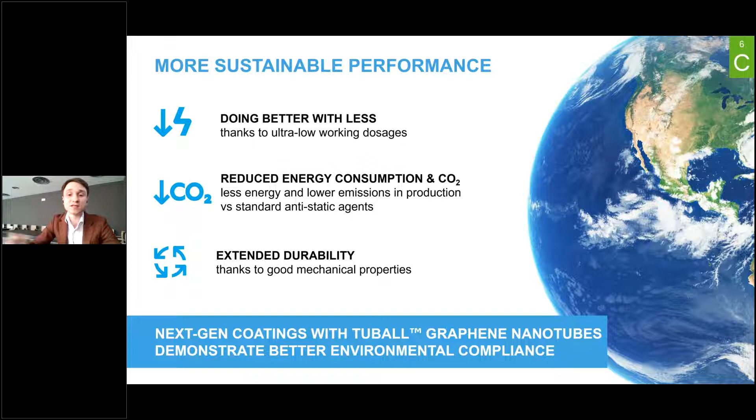To develop a new product with better properties, decreased carbon footprint, and extended durability. So let's look at single-wall carbon nanotubes, try to find benefits of this material in terms of final performance, and prove that this is the best electrically conductive agent from a sustainability point of view.

For the base of our study, I suggest taking 4 different types of industrial coatings, each with its own unique specifics. First, tank lining. This type of coating should have high chemical resistance and provide excellent anti-corrosion protection. Secondly, we will consider ESD flooring with high abrasion resistance and good aesthetic properties.

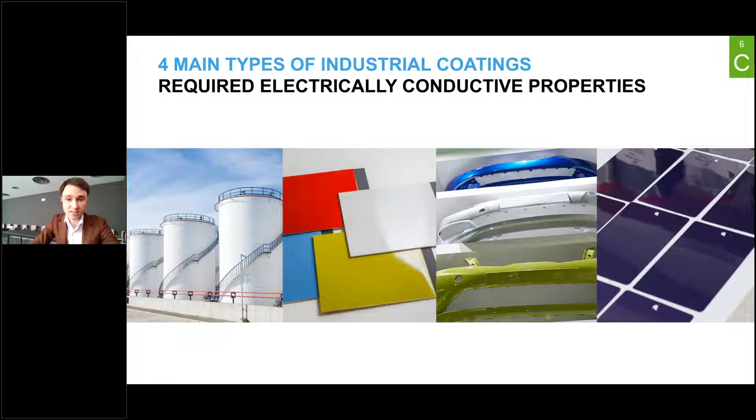Thirdly, we will talk about conductive automotive primers used for electrostatic painting in the automotive area, and these primers should provide very high adhesion and transfer efficiency of the base coat. Last but not least, the fourth application will be powder coatings with good surface quality and a completely different production process.

To bring electrical conductivity to these coatings, you can use 3 conventional fillers: first, graphite powder; secondly, conductive mica; and thirdly, single-wall carbon nanotubes. To be objective and fair, let's choose 7 main parameters for comparing the performance of these conductive fillers. Point number 1, dosage resistivity ratio.

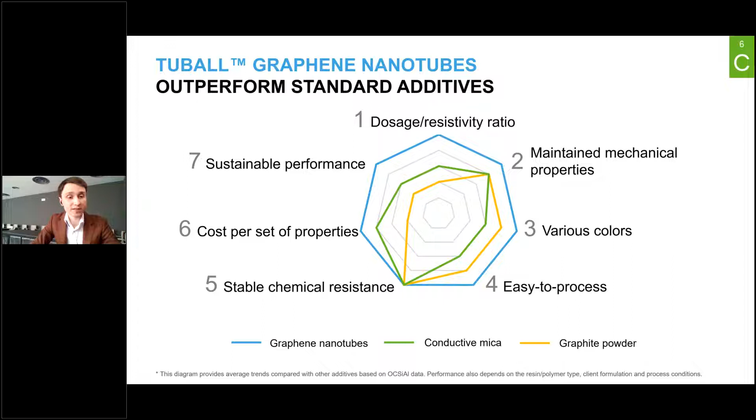Point number 2, maintained mechanical properties - the ability of the filler to negatively or positively influence mechanical properties. Point number 3, various colors - ability to produce colored coatings. Point number 4, complexity of processing - how easy it is to work with a filler. Point number 5, stable chemical resistance. Point number 6, economical aspects - cost per set of properties. And point number 7, of course, sustainability.

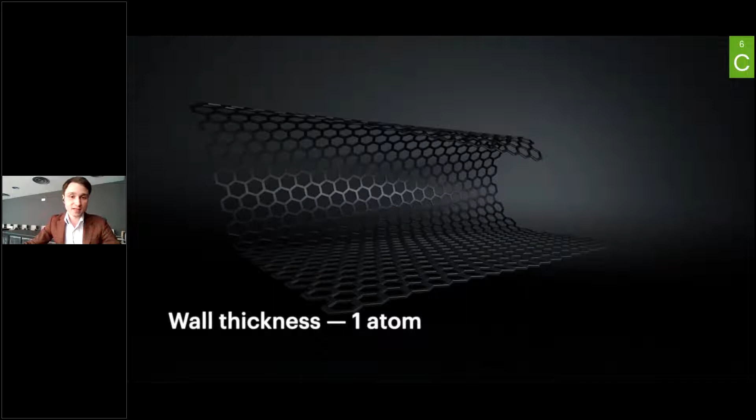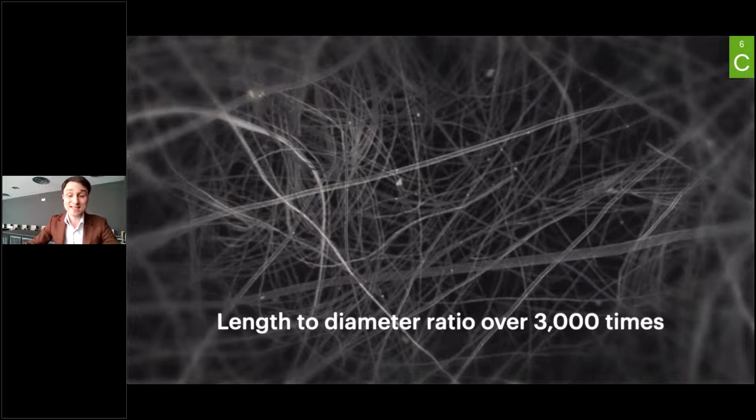Moving forward, I would like to tell you about single-wall carbon nanotubes themselves. Single-wall carbon nanotubes, or graphene nanotubes, which have the trade name Tuball, are tubes with a wall thickness of a single atom of carbon. Their diameter is about 1.6 nanometers and length about 5 microns. This material has an extremely high aspect ratio - the ratio between length and diameter - which leads to unique performance of graphene nanotubes because they are very flexible.

This is one of the strongest materials on Earth with high conductivity. Graphene nanotubes, as I highlighted, are very flexible, and in case of homogeneous dispersion, they provide the ability to influence not only electrical conductivity but also increase mechanical properties. So graphene nanotubes allow us to create completely new materials with a full range of required properties demanded from the market. Now let's explore which specific properties single-wall carbon nanotubes can bring to industrial coatings, and why they are better than any other antistatic additive.

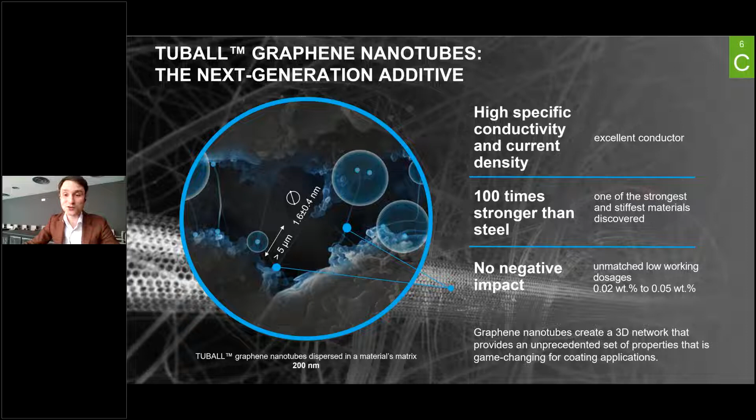Coming back to the final applications, I would like to start with tank lining coatings. Many companies have already validated single-wall carbon nanotubes, and here is just one example where 30% of conductive mica was substituted with just 0.03 weight% of single-wall carbon nanotubes. This tiny amount is enough to provide stable and permanent electrical conductivity and very good mechanical properties.

But also, the next point is color. Color is a huge advantage for this type of coating for two reasons. First, many servicing companies today require tank lining coatings in two colors, for example dark and light gray, or dark brown and light brown. You can ask me why - because they can more easily and properly control the thickness of the coating during application.

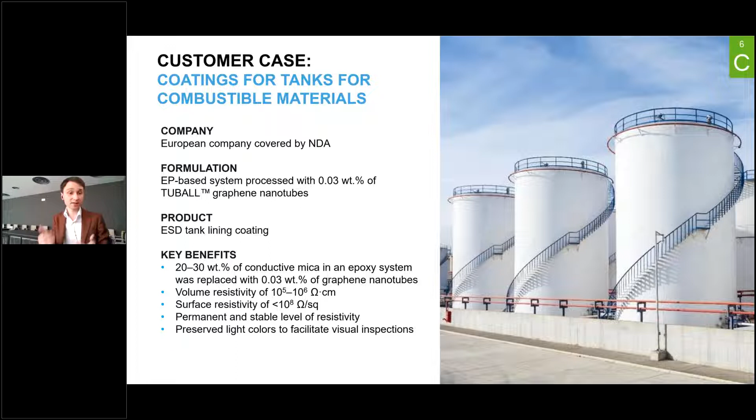Just imagine the specialist of the servicing company may apply a dark layer and then a light one, and in the areas where there is contrast between them, the specialist very quickly recognizes inappropriate thickness of the layers, which helps save a lot of time during application. The second reason is that after some time, it will be much easier to inspect defects on the internal surface of tank lining coatings if it's light. Also, the cleanliness of the tank will be much easier to inspect if the tank lining coating is light.

But besides that, Tuball allows covering the full range of requirements we see today on the market. For example, only 0.02 to 0.05 weight% of single-wall carbon nanotubes will be able to cover 10^4 to 10^11 ohm-centimeter volume resistivity and surface resistivity.

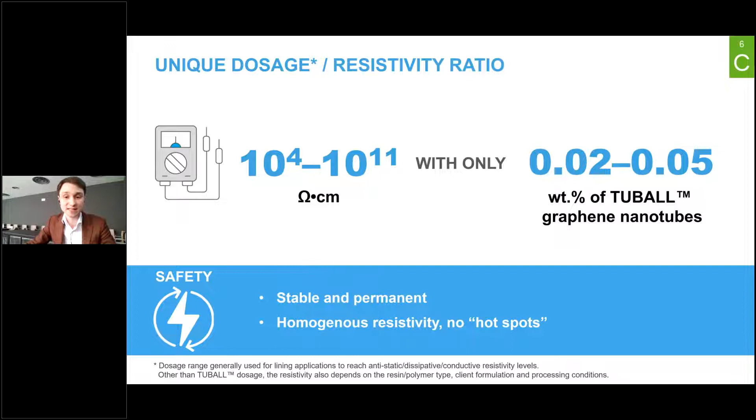Electrical conductivity as a property will live as long as your tank lining coating lives. We provide permanent properties which don't depend on environmental conditions like UV radiation or humidity. Graphene nanotubes, in contrast to traditional conductive agents, maintain mechanical properties of the original non-conductive epoxy coating, resulting in a high level of durability and a prolonged service life.

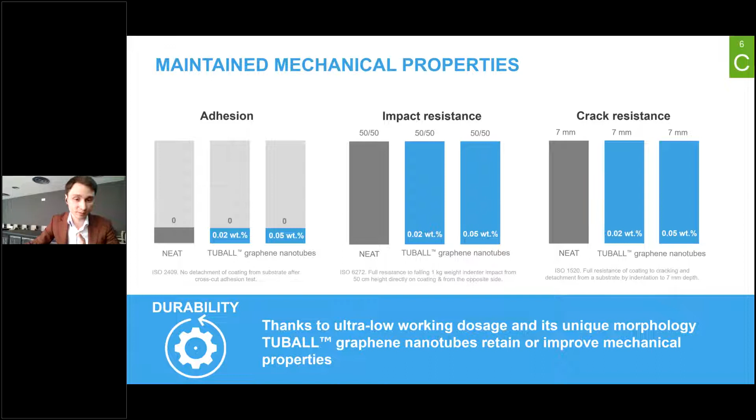As I highlighted before, our single-wall carbon nanotubes are very flexible, and due to the low working dosage, they perform very well in terms of adhesion, impact, and crack resistance tests. But most important for this kind of protective coating, our single-wall carbon nanotubes bring electrical conductivity, maintain mechanical properties, but also maintain chemical resistance of the base formulation.

A specific industrial immersion test was done successfully. Tank lining coatings with single-wall carbon nanotubes have passed tests for crude oil, gasoline, ethanol, and of course water.

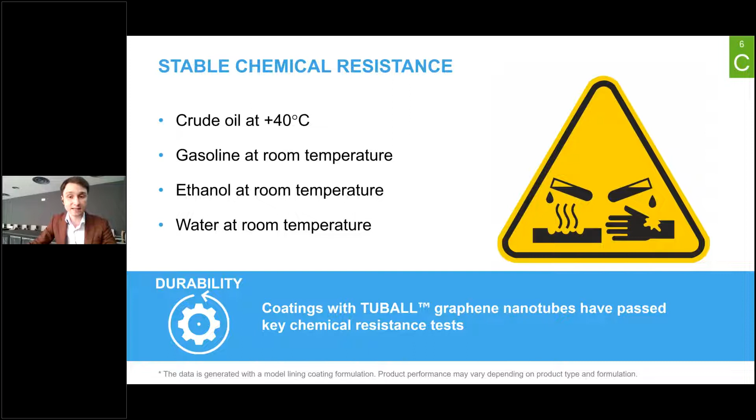Besides tank lining coatings, there is another type of coating where mechanical properties and chemical resistance are also important: ESD flooring. Currently, more than 70 companies have already validated our products for this application, and there are a lot of reasons why. First of all, carbon nanotubes allow achieving the required level of resistivity according to all existing standards relevant for the European, American, and Asian markets.

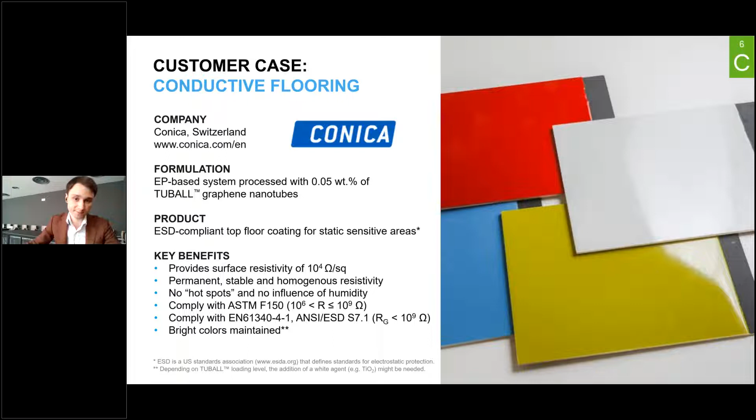Stable electrically conductive properties without hot spots and good aesthetical properties are highly welcomed by our customers. Due to the low working dosage of graphene nanotubes, it will be possible to produce colored coatings.

On these two charts, you can see the dependence of volume resistivity and surface-to-ground resistivity on the working dosage of single-wall nanotubes, and at the same time, the dependence of color in terms of RAL shades. So just an addition of a tiny amount of titanium dioxide or some other pigments can bring you light colors, and at the same time give you the ability to produce static dissipative or even conductive formulations.

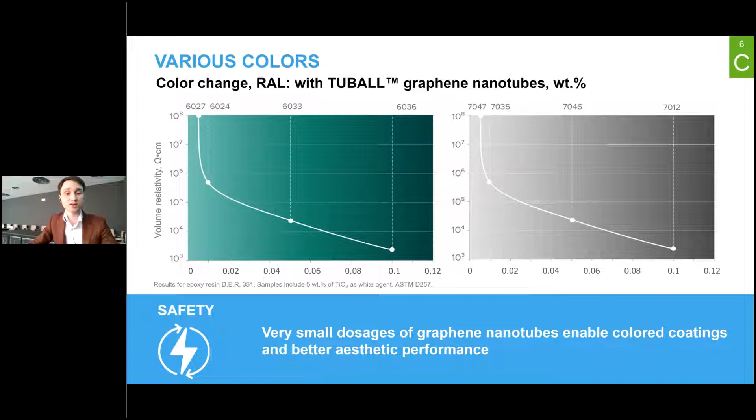Let's compare single-wall carbon nanotubes with conventional electrically conductive fillers available on the market. One of them is, of course, chopped carbon fibers. It is a very well-known agent, but it still has some drawbacks.

The first one is the limitation of base coat thickness. Generally, due to technology and the average length of chopped carbon fibers, the base coat thickness is around 2 millimeters, because you need to orient chopped carbon fibers, and this is the main limitation.

Also, the usage of chopped carbon fibers can be quite sensitive, and in many cases can lead to hot spots, which is a flooring area with insufficient level of resistivity, and some black dot spots on the surface, which is not very good for aesthetic properties. And if you damage some anti-static flooring with chopped carbon fiber, there is a high risk that you can lose the required property as well.

I can tell you a short story which I faced in my own experience. Our customer produced a top coating with our single-wall carbon nanotubes inside, and they sold this formulation to their customer, a servicing company, which applied this top coating. Then after the application, the end customer asked an external laboratory to test surface-to-ground resistance.

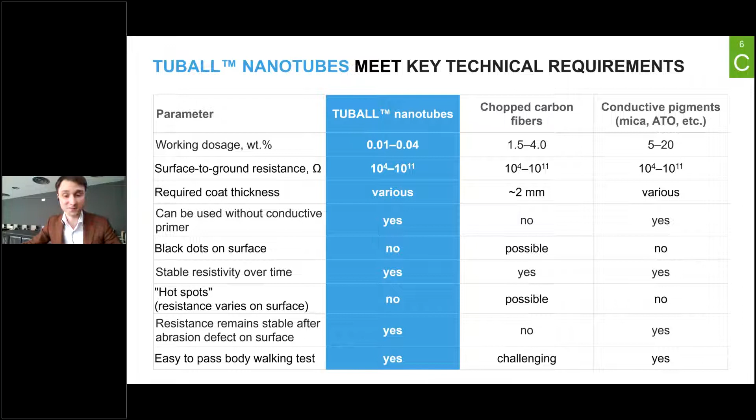Let's move forward. There are a lot of different applications. The next one is conductive primer with very low surface resistance, which is required for high transfer efficiency of the base coat. Here it is crucial to provide excellent adhesion of the base non-conductive primer to the substrate, and we can do it.

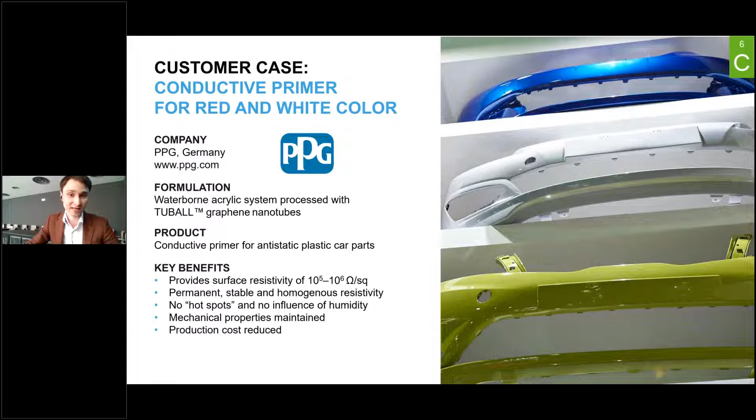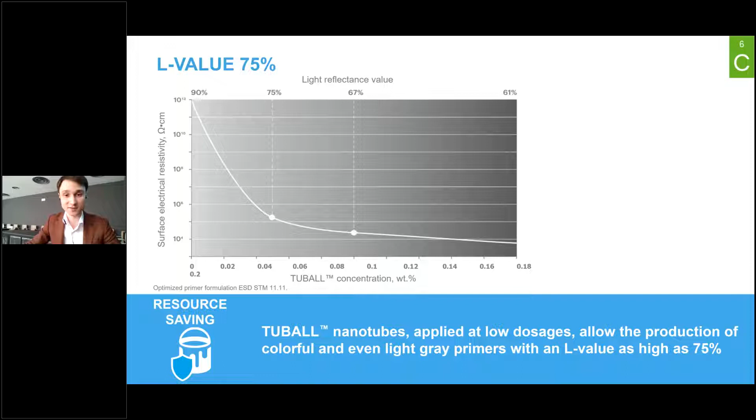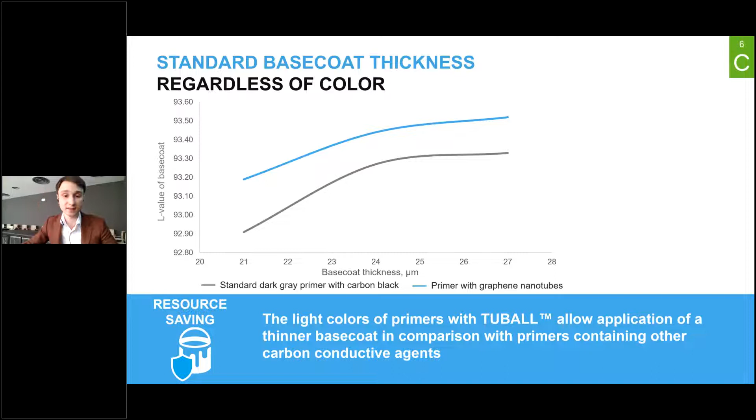This is extremely important, because if we apply the same thickness of the base coat on samples, on the same substrates which were painted with black primer and with a light gray primer, we will see differences in the final L value. This is important because we can decrease the consumption of base coat and reduce the costs for the overall formulation.

What is crucial to add is that today it is possible to create conductive primer not only for polypropylene substrates, for example polypropylene bumpers or trims or other exterior parts, but also for SMC exterior parts. Initial trials have shown that it might even be possible to assemble an SMC part coated with the primer, assemble it with the metal body, and paint it at the conveyor. So we have such an ongoing project, and if you are interested, we'll be extremely happy to discuss it more precisely separately.

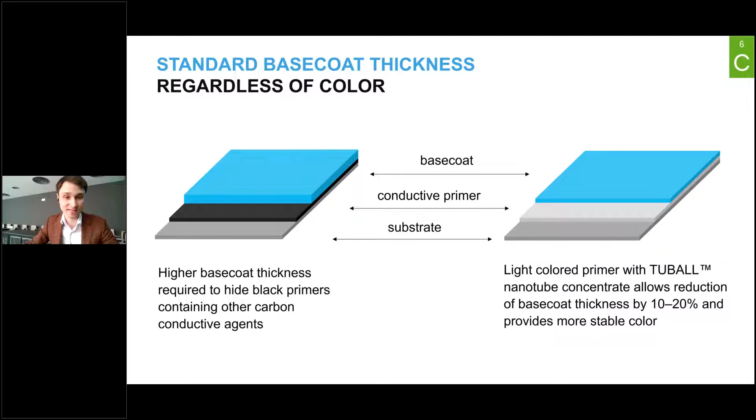Single wall carbon nanotubes provide very good conductivity of the primer, which performs extremely well in terms of transfer efficiency. On the slide, you can see that even in comparison with steel, transfer efficiency is very high.

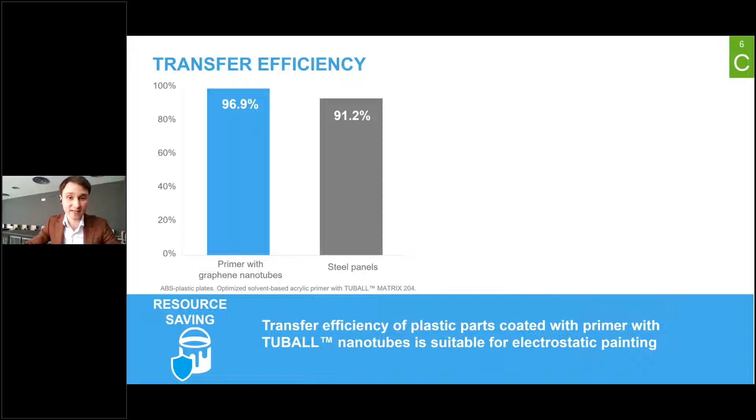Last but not least are powder coatings, and here we provide the ability to produce different types of powder coatings with different textures, for example sandy texture or smooth texture, and also to cover two ranges of conductivity: static dissipative powder coatings as well as conductive powder coatings, with of course the ability to produce colored solutions.

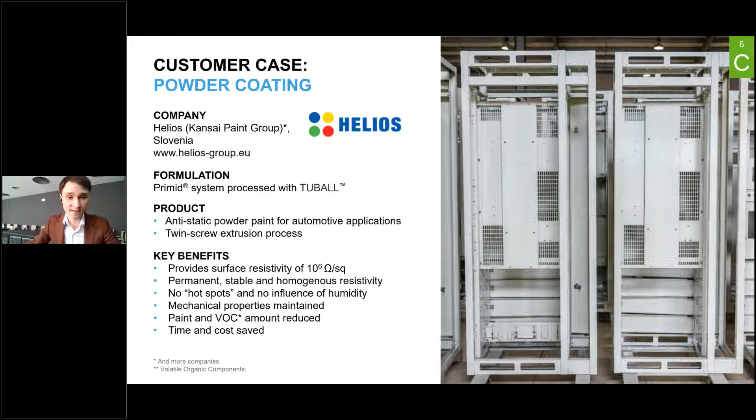What is important to mention as well—I can tell you that many of our customers tested carbon black before. Of course, this is a cheap solution.

If they would like to produce a conductive coating, they are required to use a rather high level of carbon black, and sometimes it was not even possible for them to extrude this material due to the high viscosity. In our case, the dosages are so small that we don't have such negative influence on viscosity during extrusion, so on industrial lines there are no problems, and this is a very stable solution.

Also, on the second chart, you can see the percolation curve. It is required to use just 0.01 to 0.05 weight percent of single wall carbon nanotubes in the final formulation to cover the full range of electrically conductive or static dissipative coatings.

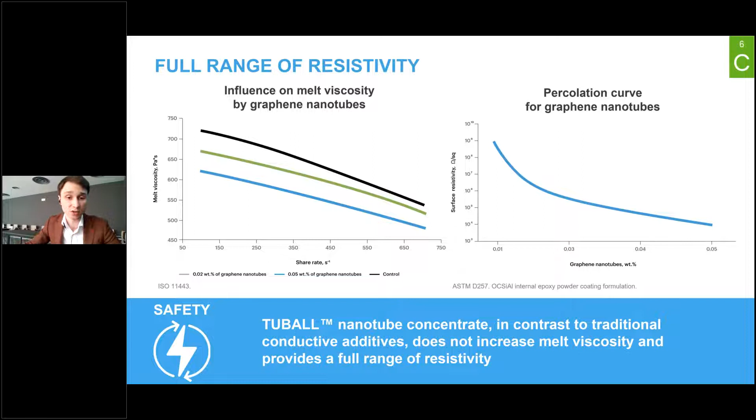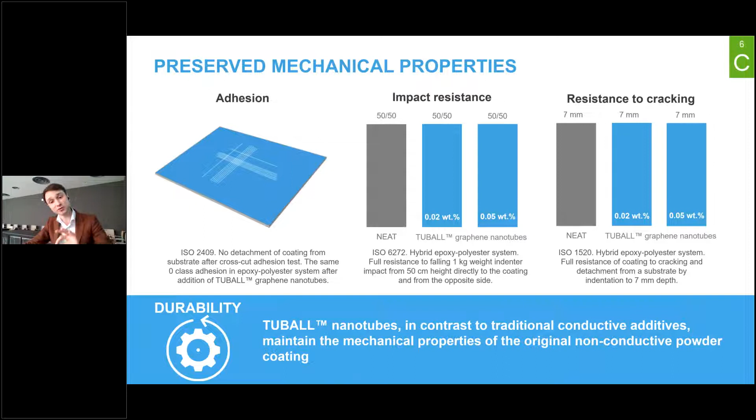Due to the unique morphology and flexibility of single wall carbon nanotubes, we maintain adhesion, impact resistance, and resistance to cracking. So in general, mechanical properties are maintained, which is extremely important. We just add electrical conductivity as an additional property without any other changes.

Let's sum up some general advantages of single wall carbon nanotubes. First of all, it is easy to work with them. To be honest, you don't even need to disperse pure single wall carbon nanotubes at all, because you will get from our side a Tuball matrix.

We produce concentrates which are pre-dispersed single wall carbon nanotubes in some carriers. These additives usually contain only 10% carbon nanotubes and 90% carrier, which is compatible with your type of formulation. Currently we have a lot of projects, and all of these projects are, of course, unique.

Sometimes they have their own specifics, so we have developed a huge portfolio of products compatible with solvent-free, solvent-based, and water-based coatings, compatible with different types of binders: epoxy, polyester, vinyl ester, phenolic, acrylic, and so on. We have also implemented a quality control management system according to different ISO standards, and also according to IATF standards, which are highly welcomed in the automotive industry.

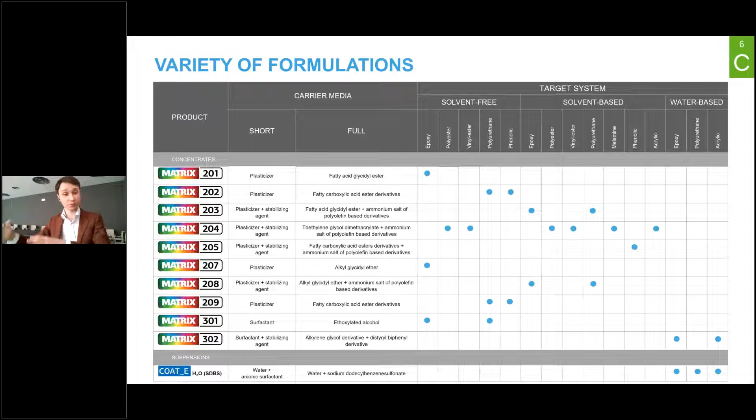We pay huge attention to quality, and we are completely sure that everything presented on this slide and other products as well will be of higher quality. Secondly, I would like to mention that today it's easy to work with our concentrates. It's easy to do.

You just need to proceed with your existing processing conditions: premixing, extrusion, cooling, milling, sieving, and packaging. Nothing special. And if we're talking about liquid systems like primers, ESD flooring systems, or other types of liquid coatings, there are several options.

There are several options. The most commonly used type of equipment is just a high-speed mixer dissolver, nothing special. We can provide you with full technical support from our side. We can tell you all the details, which type of blade we recommend, and which level of peripheral speed at the edge of the blade we recommend.

We recommend this to provide better dispersion quality, at which stages we recommend to dilute and to add our additives, and all other technical details. So we have huge experience in this area, and we will be extremely happy to share this experience with you entirely.

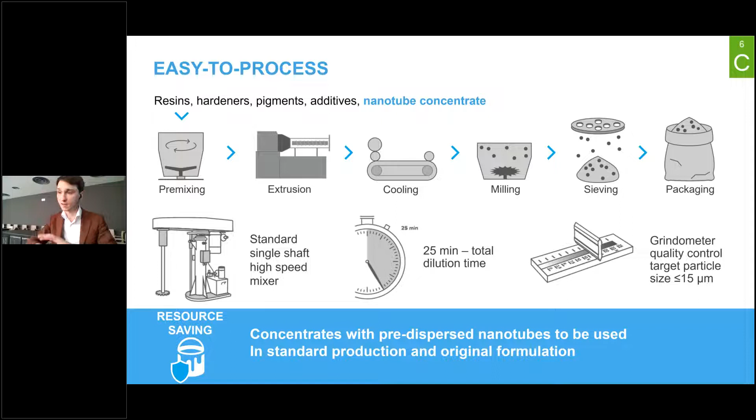Thirdly, of course, the most important thing is performance. Currently, single wall carbon nanotubes give the ability to cover a huge range of electrically conductive requirements. We don't have a negative influence on mechanical properties; moreover, we maintain them, and we give the ability to produce colored coatings.

The working dosages of our material are so small that you need to operate with an extremely low amount of our concentrates, so it's easy to store and ship them. And the most important, of course, are the economical aspects. Today we are competitive.

Today, single wall carbon nanotubes are not something only, I don't know, NASA can afford to use. No, today our products are competitive, and we can cover the full range of required properties demanded by the market. Looking for the low working dosage, of course, speaks for itself - less raw material is needed to create higher performance products.

Furthermore, there is also a reason why it leads to reduced energy consumption compared to other antistatic agents. Depending on the project, less CO2 will be emitted for modification of the same type of ESD industrial coating in case you use single wall carbon nanotubes, in comparison with any other conventional conductive materials.